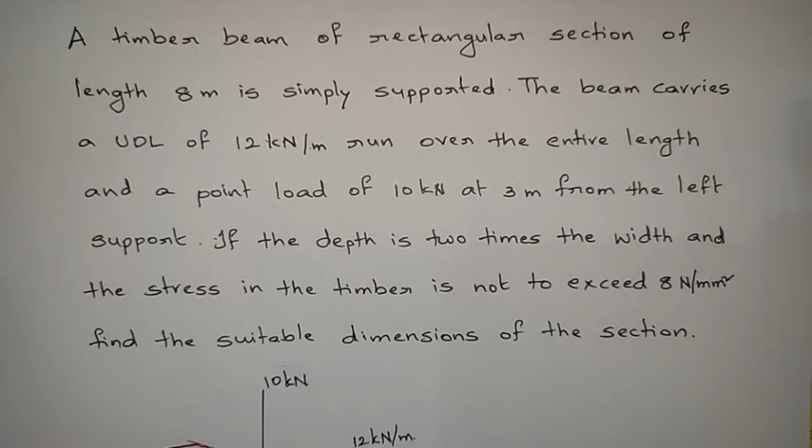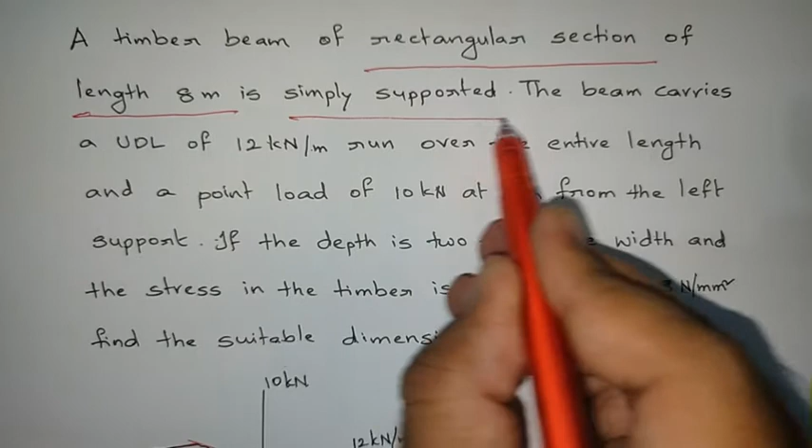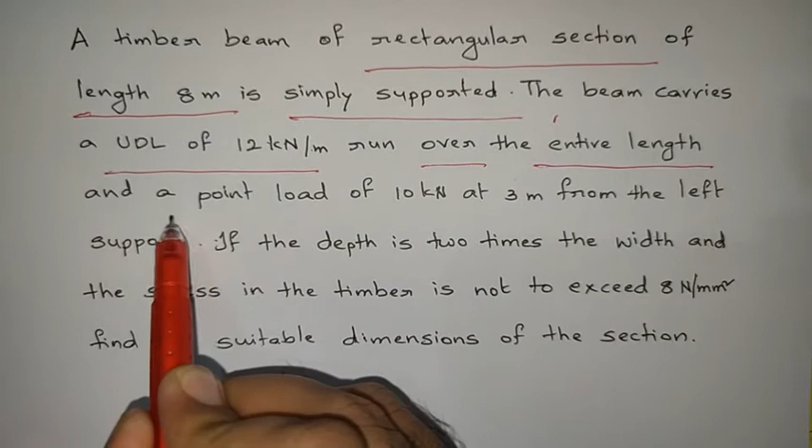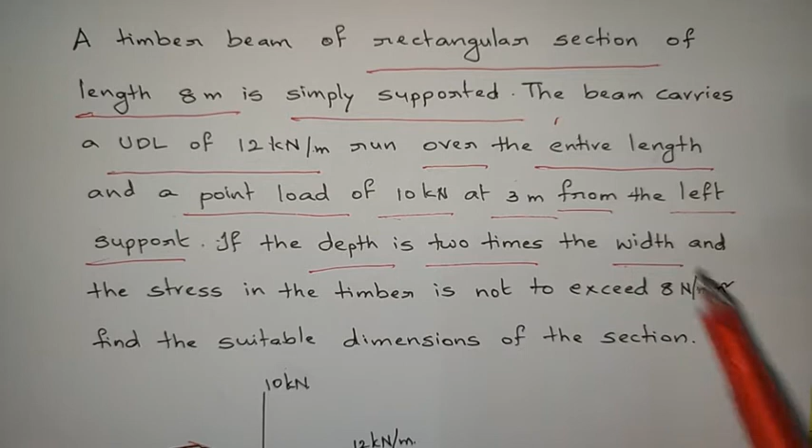Now see here: a timber beam of rectangular section, length 8 meters, is simply supported. The beam carries a UDL of 12 kN per meter run over the entire length and a point load of 10 kN at 3 meters from the left support. If the depth is 2 times the width and the stress in the timber is not to exceed 8 Newton per mm square, find the suitable dimensions of the section.

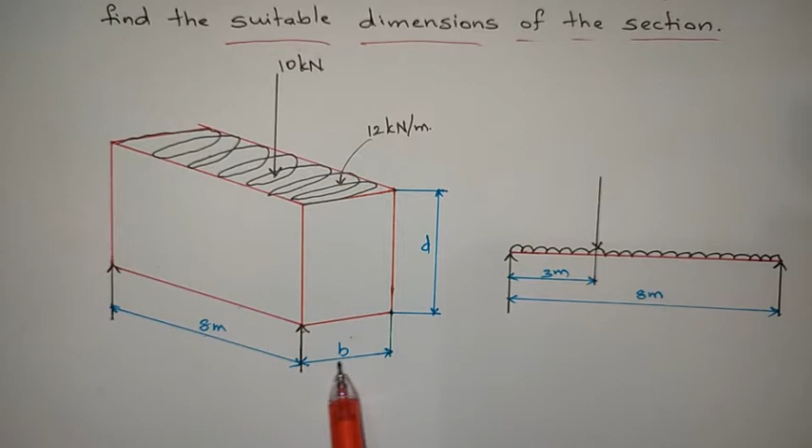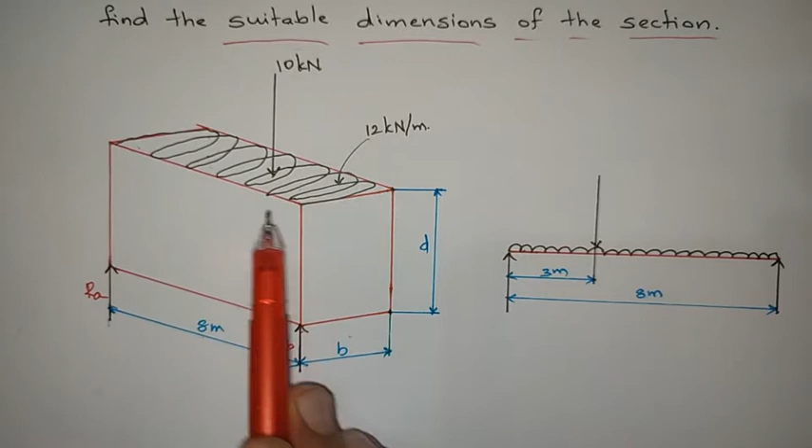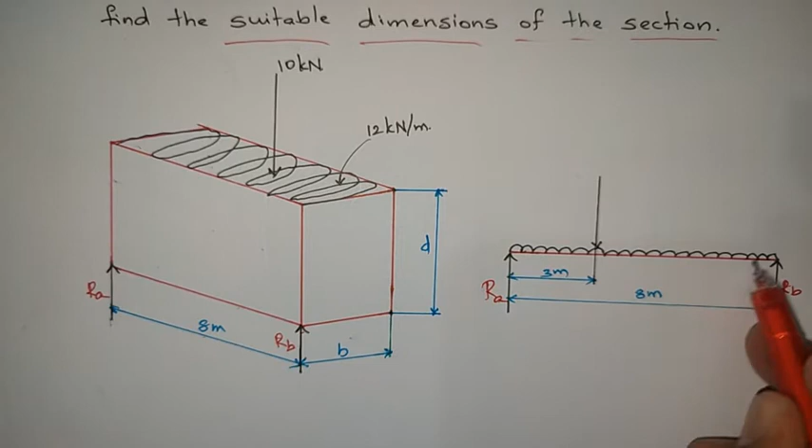Since it is simply supported, two support reactions act, RA and RB. The UDL acts over the entire length, and a point load of 10 kilonewtons acts at 3 meters from the left end. The same thing is represented in a one dimensional figure: simply supported beam, support reactions RA, RB, 8 meters length, UDL acting over the entire length at 12 kilonewton per meter, and a point load of 10 kilonewton at a distance of 3 meters from the left end.

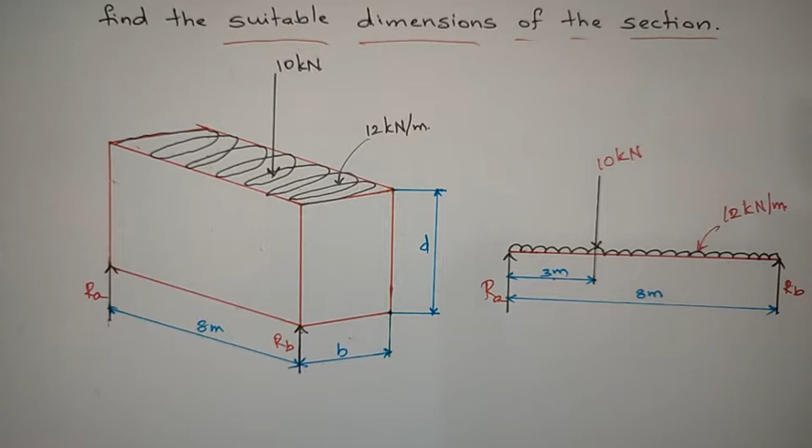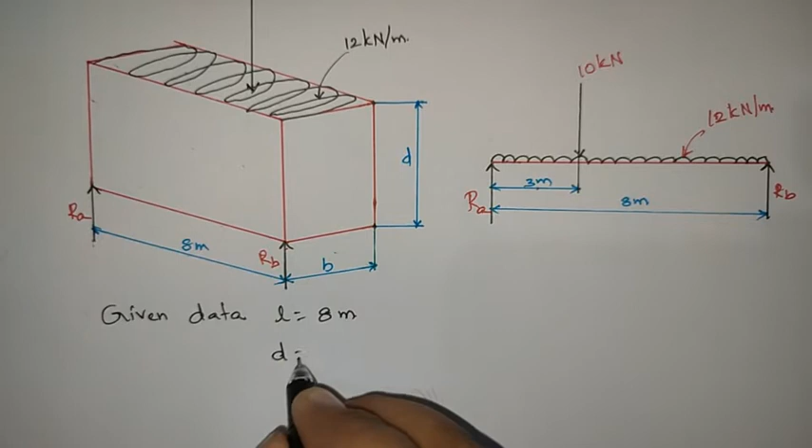He is asking us to find the dimensions of the beam, so first let us write the given data. Length of the beam is given, that equals 8 meters. Next, UDL value and point load values are given. Depth is 2 times the width, D equals 2B, and sigma max is given as 8 Newton per mm square.

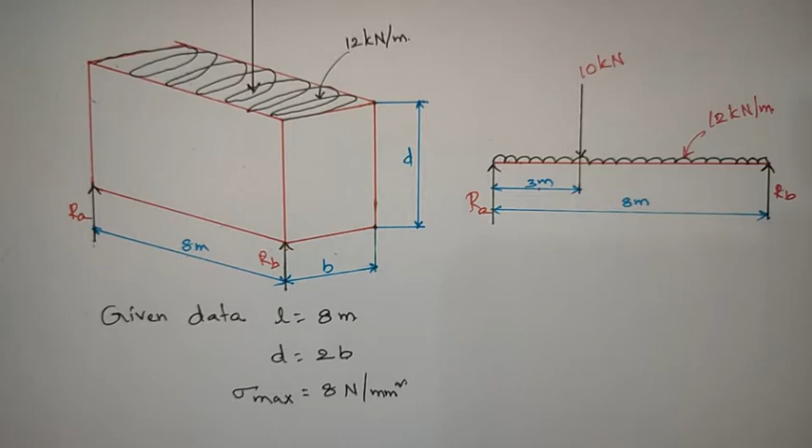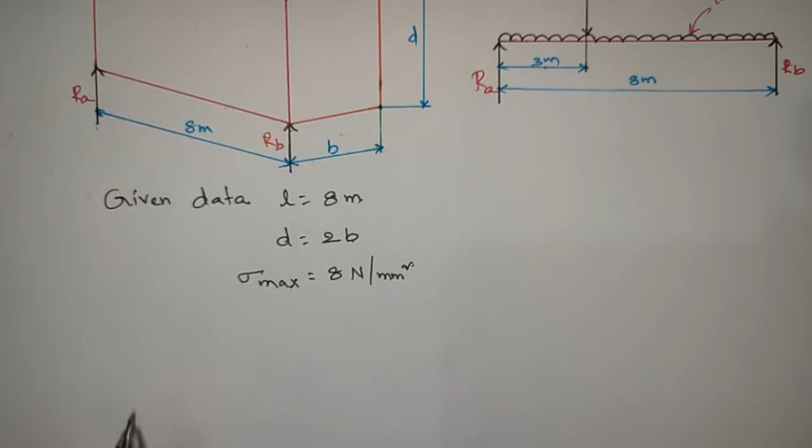Because of these two loads, a bending stress is created in the beam. Now we need to use the bending equation. What is the bending equation? M/I equals sigma/Y equals E/R. Since E and R values are not given, I am using this relation.

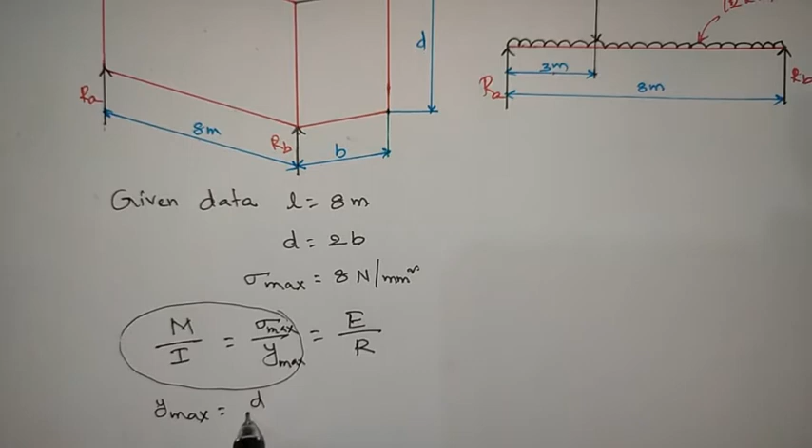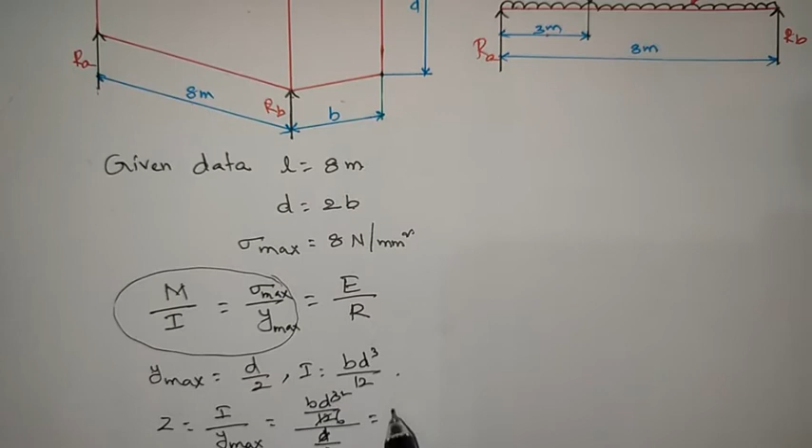This relation becomes sigma max when Y equals maximum. What is Y max? Y max equals D/2. What is the I value? BD cube by 12. Then what is Z? Z equals I by Y max, so BD cube by 12 divided by D/2, that equals BD square by 6.

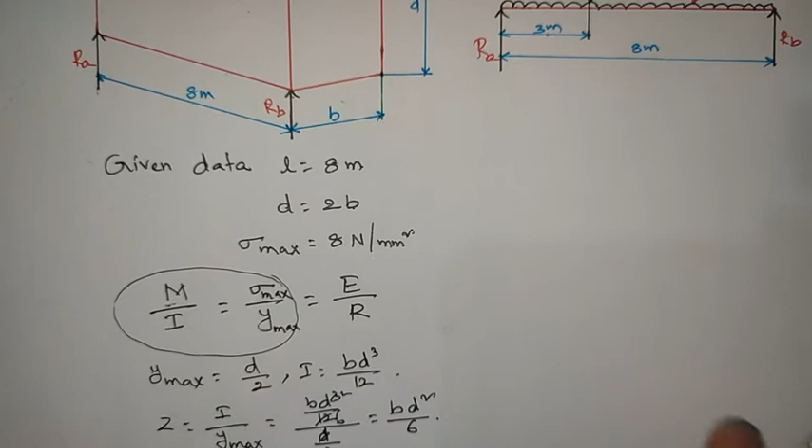Sigma max he has given. What else do we need? We need M, the maximum bending moment. How to find it? We already told that this equation governs for pure bending - it works out only when shear force equals 0.

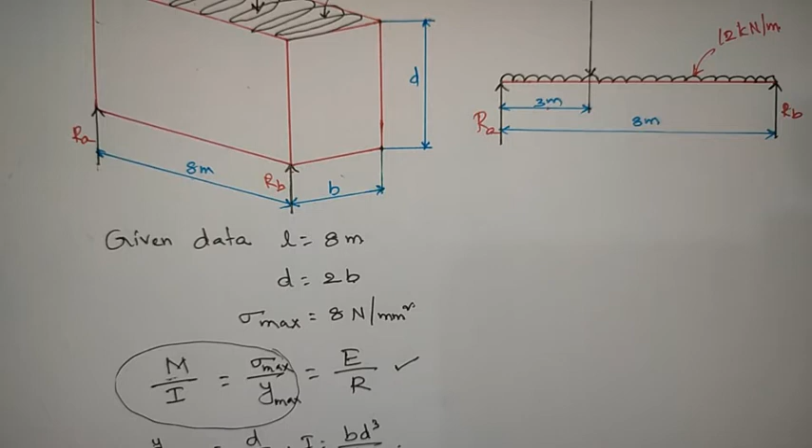Now let us solve the problem based upon this condition. I am going to calculate the shear force at a section. I am taking a section, xx section. Here I have taken a section xx.

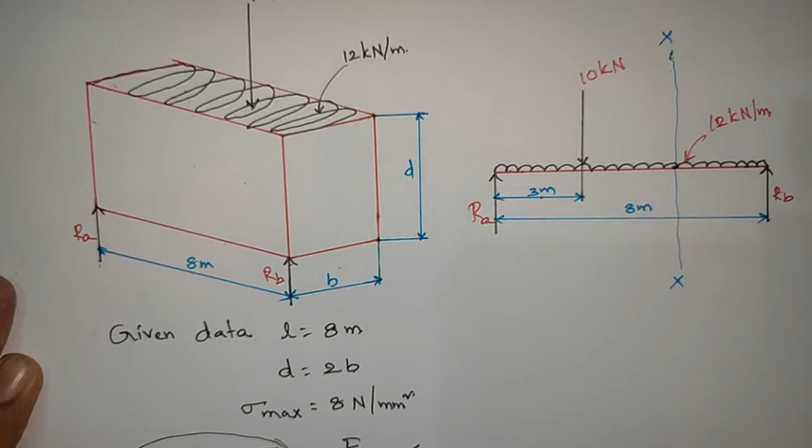Let us say the shear force at this section xx is 0. If shear force is 0, what remains completely? Only bending stress remains. Here I am assuming the shear force is 0, so that there will be only bending moment, and that bending moment will create the bending stress.

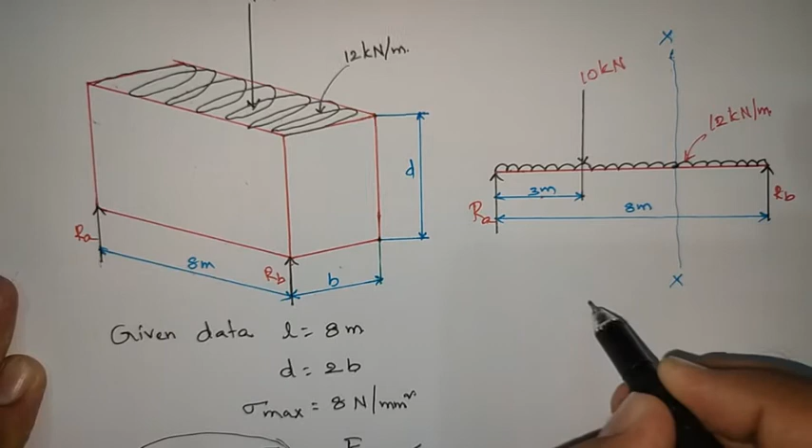First of all, find the support reactions. In order to find support reactions, first use equilibrium conditions: RA plus RB equals 10 plus 12 into 8 meters, that equals 10 plus 96, that equals 106. This is equation number 1. Next, calculate the moments with respect to A and equate to 0. Then RB into 8 meters.

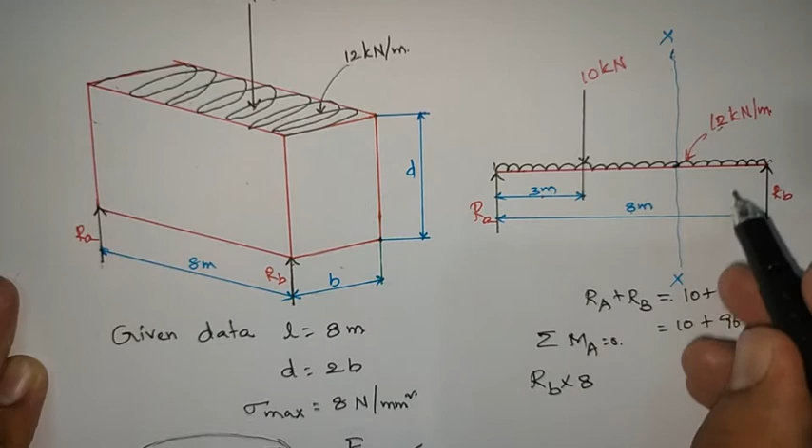Next, 12 kilonewtons - so 12 into 8, into where it is acting. If you convert this UDL into a point load, it acts at a distance of 4 meters. What is this point load value? 12 into 8, that is 96. So what is the moment? 96 into 4, but since it is clockwise, we take it as minus.

Taking moments, next 10 into 3 is also clockwise, equals to 0. So 8RB minus 2 into 4, 96 into 4, minus 30 equals to 0.

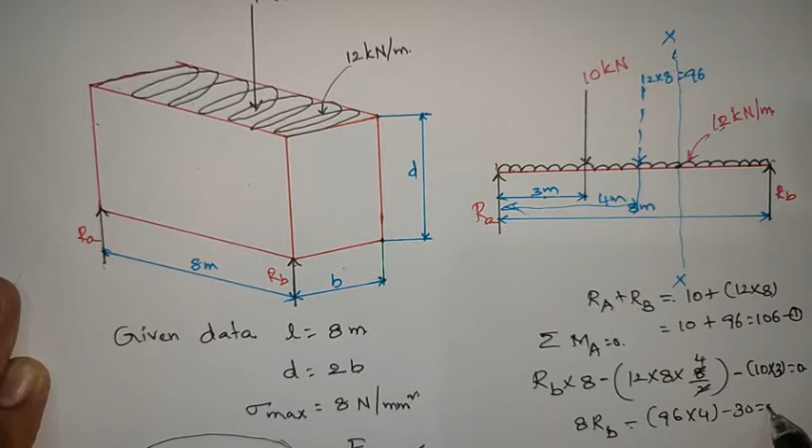So from that what we will get? We will get RB. So RB is equals to 51.75 kilonewtons.

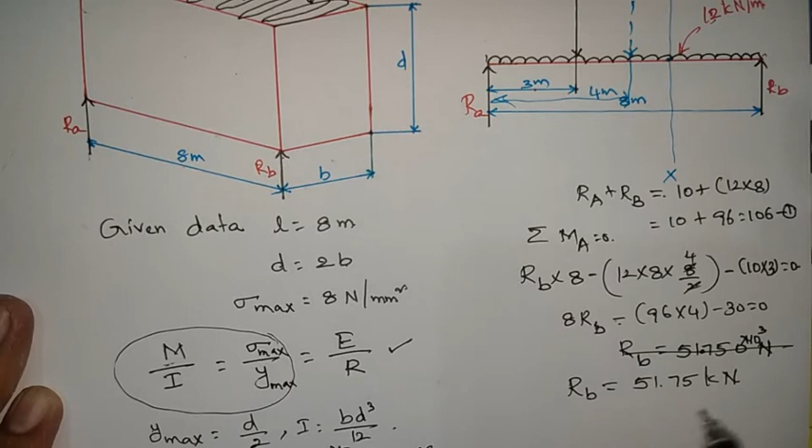So here initially you will get 51.75 into 10 cube newtons. So if you calculate RB you will get as 51.75 kilonewtons. If you convert kilonewtons into newtons, you will get 51750 newtons, right?

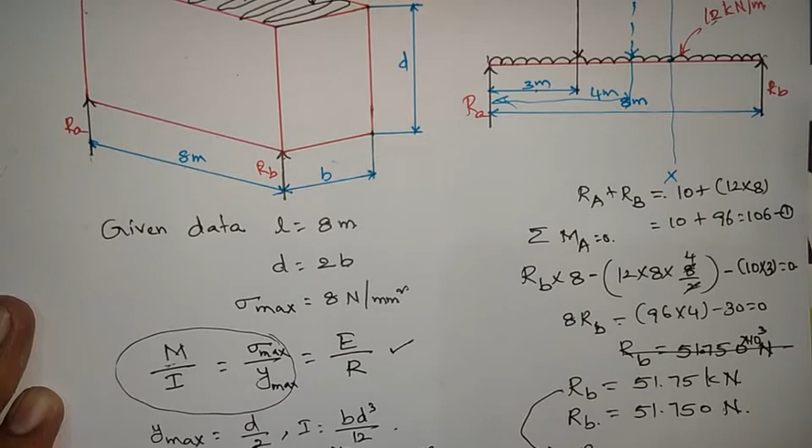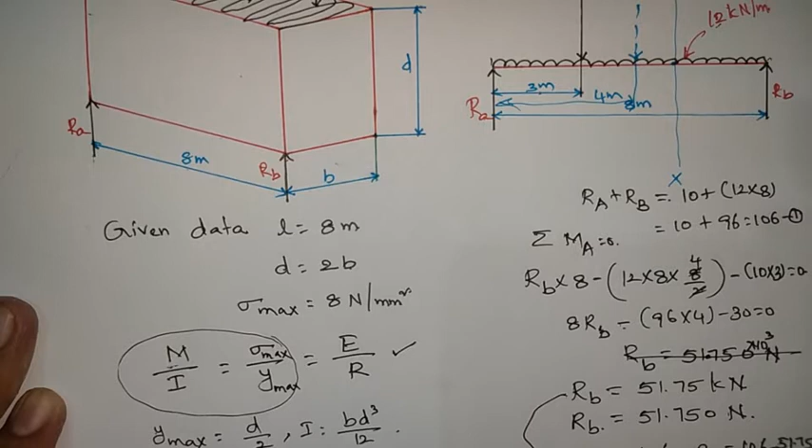Next, substitute this RB value in this equation, then RA equals to 106 minus RB. So that equals to 106 minus 51.75, so that one you will get it as RA equals to 54.25 kilonewtons. If we convert into newtons, 54250 newtons. This is RA.

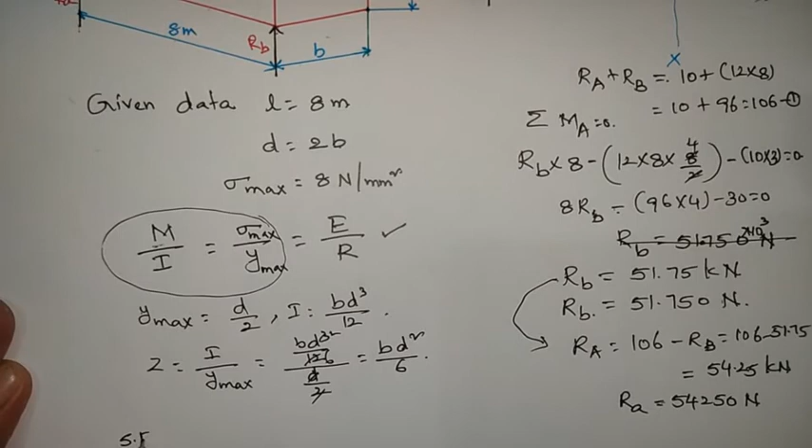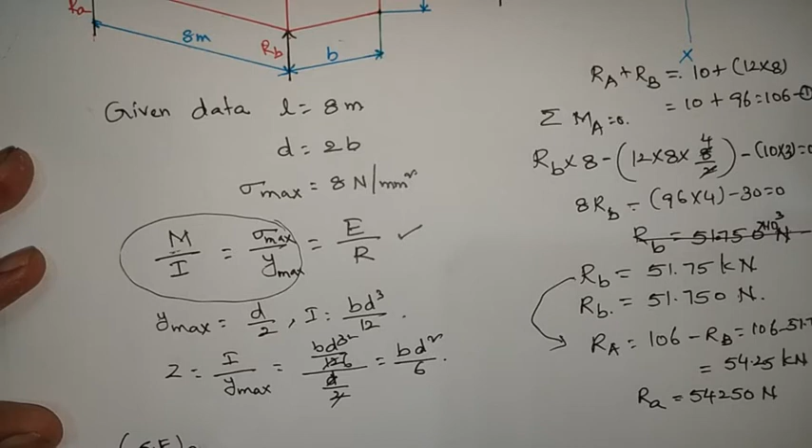Okay, so now calculate the shear forces. So first shear force at B. Here I am taking it as A, this one is B, and this one is point C. So what is shear force at B? That equals to RB. But I require the shear force at section XX.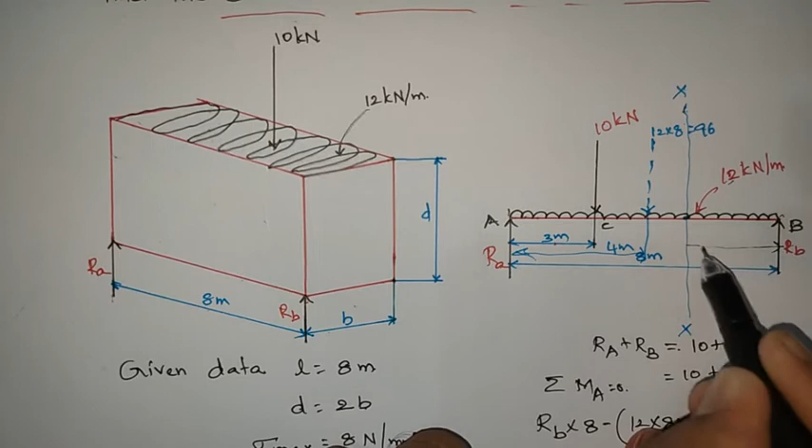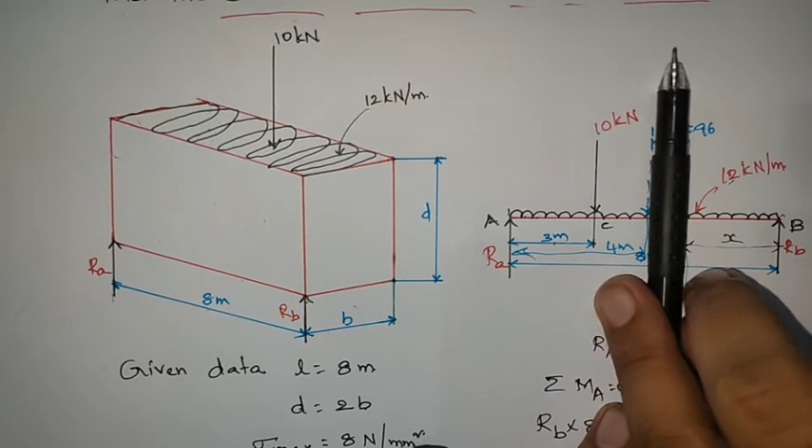I need the shear force at section XX. So what is shear force at section XX? That equals to minus RB plus 12 into x, where this section XX is at a distance of small x from B. So shear force at section XX is equals to minus RB plus 12x.

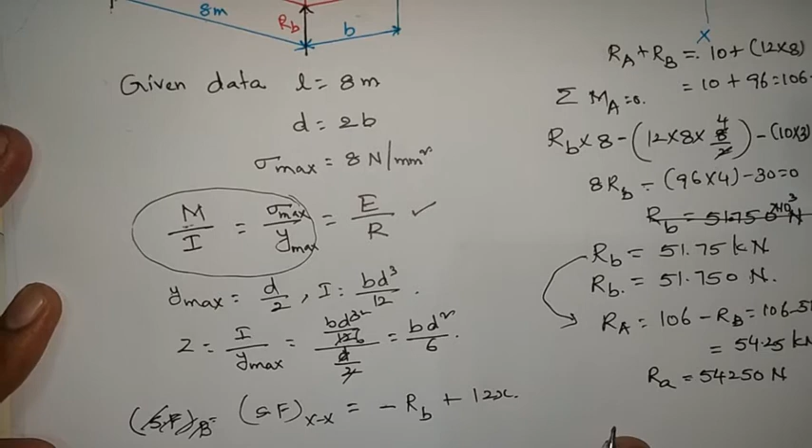What is 12? Here 12 is in terms of kilonewtons. Here I also substitute RB in kilonewtons, no problem. Substitute RB also in kilonewtons: 51.75 plus 12x. Okay, so but what I am saying, this shear force is equals to 0.

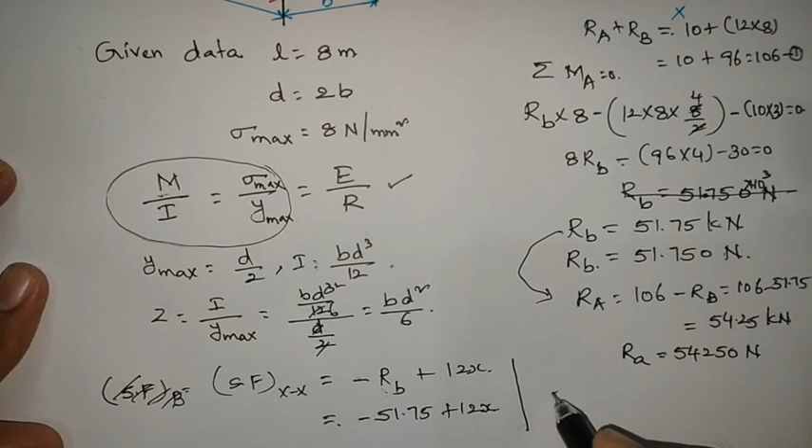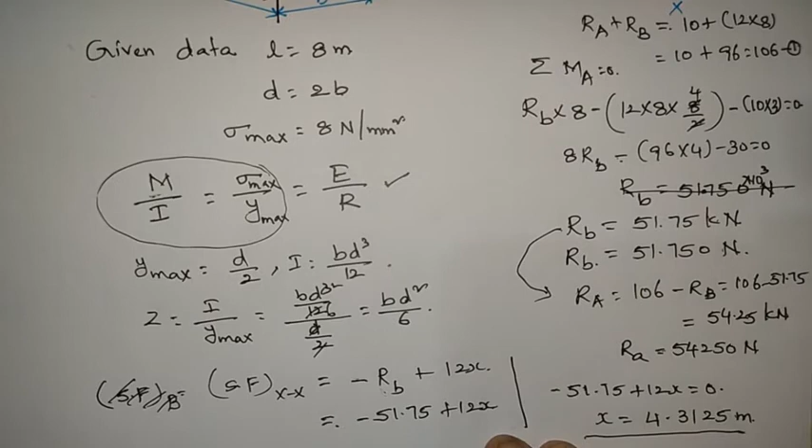I'm saying what this shear force value becomes when it equals 0. So then minus 51.75 plus 12x is equals to 0. Then what is x value? X equals to 4.3125 meters. Okay, so now calculate the bending moment at this section.

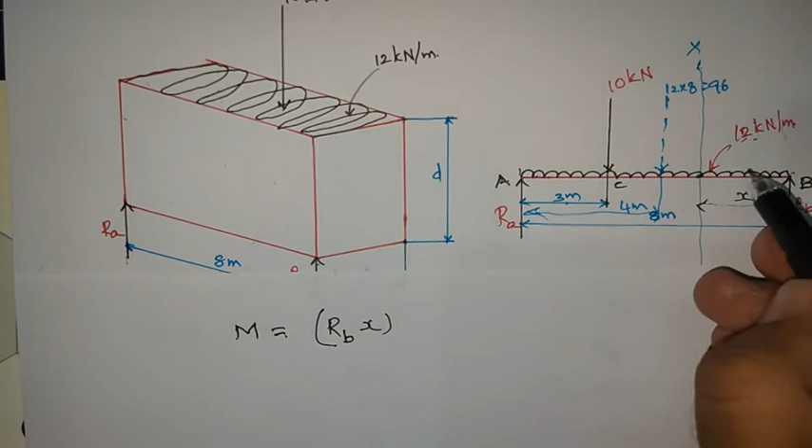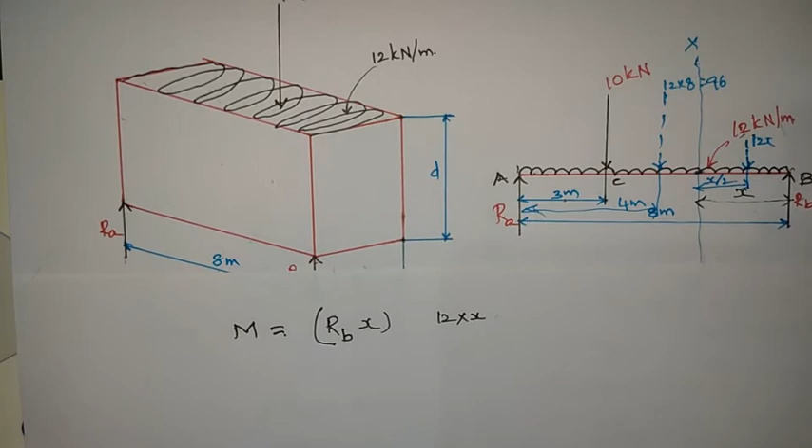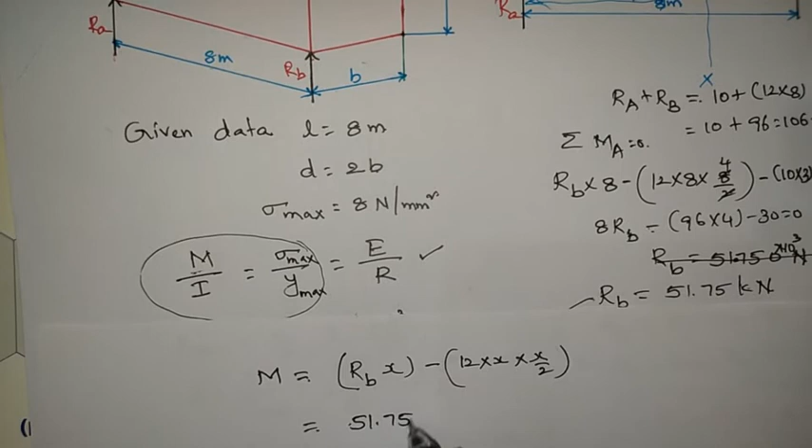So 12x into x/2, that is minus. So now substitute the values. RB, how much? 51.75 kilonewtons into x value 4.3125, we got it. So 4.3125 minus 12 into 4.3125 square by 2. So then you will get the maximum bending moment.

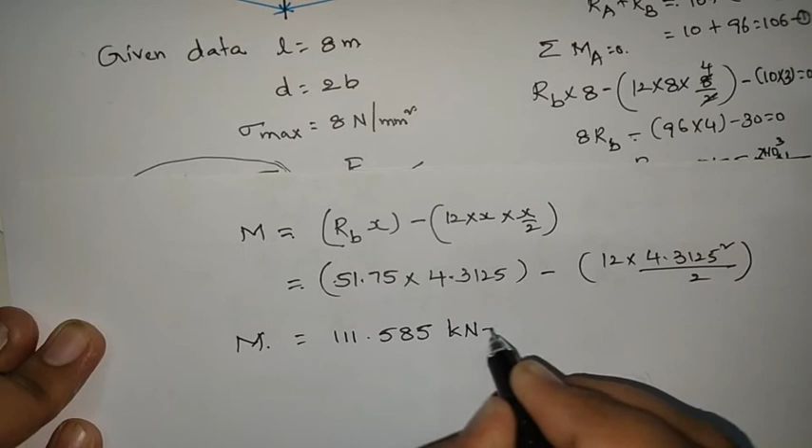So that maximum bending moment will be equals to 111.585 kilonewton meter. Why? Because we substituted RB in kilonewtons. So if you convert this into newton mm, so 111.585 into kilo means 10 cube newton.

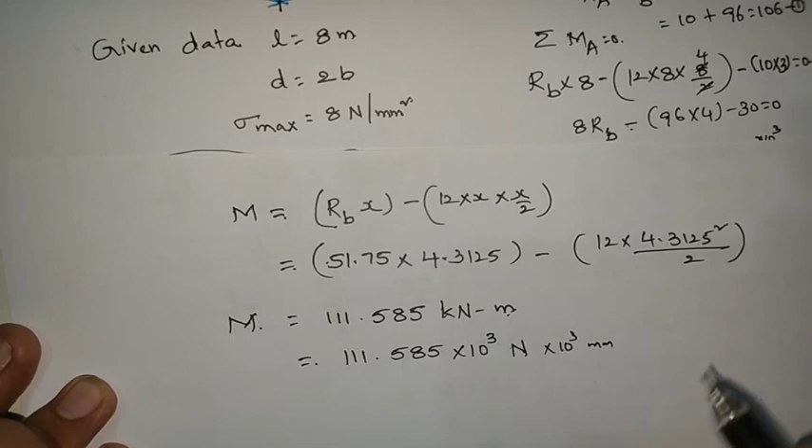For 1 meter, how many millimeters? 10 cube millimeters. So that equals to 111585 into 10 cube Newton mm.

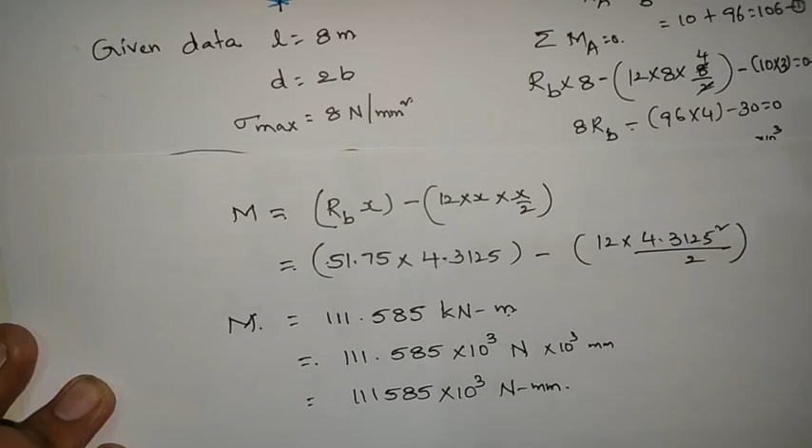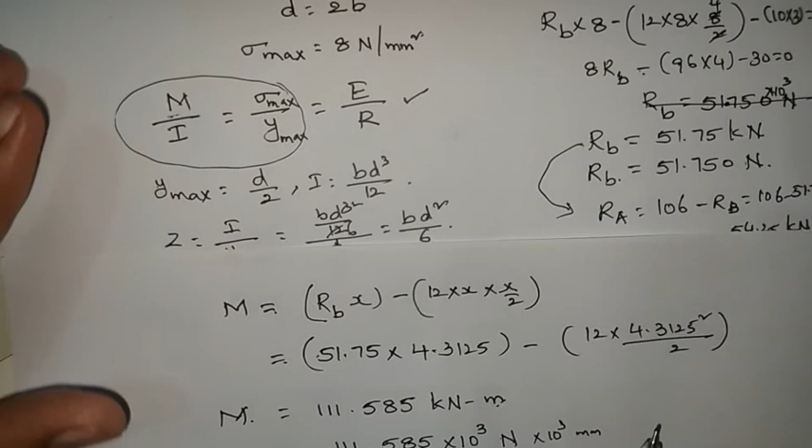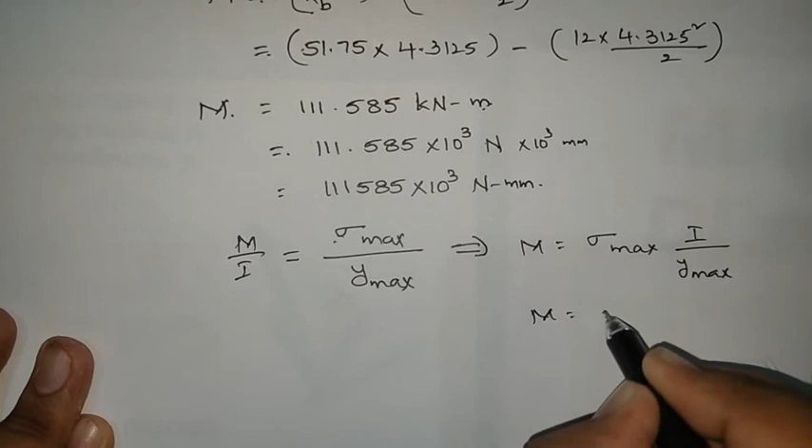Okay, so now let us substitute in this formula. So what is the formula we got? M by I is equals to sigma max by y max. So M by I is equals to sigma max by y max. So that implies M is equals to sigma max into I by y max. So M is equals to sigma max into Z.

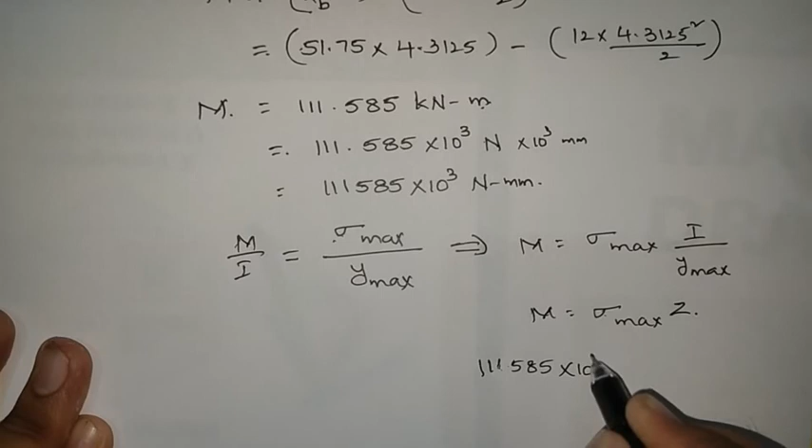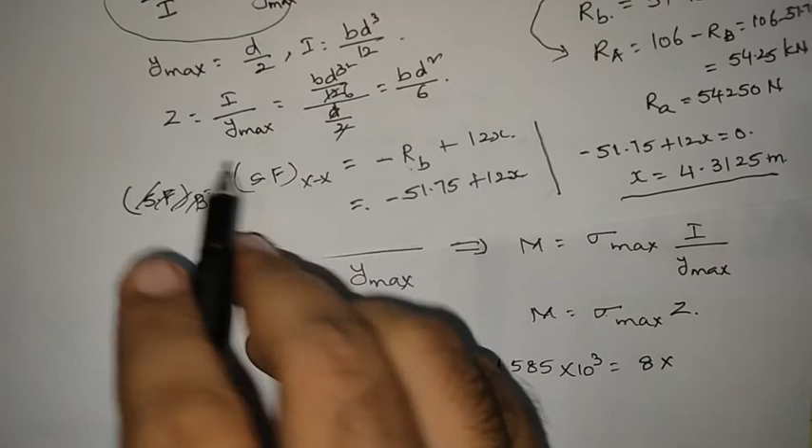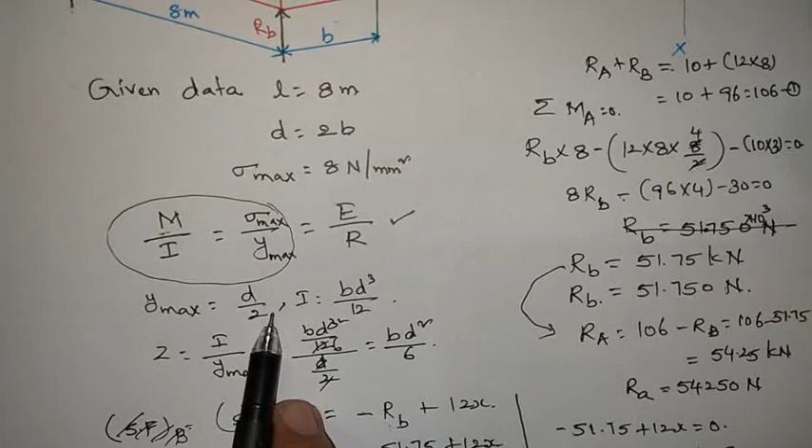So what is M value we got? 111585 into 10 cube is equals to, what is sigma max? Sigma max is 8 Newton per mm square into what is Z value? BD square by 6. But he gave depth as 2 times the width. Depth is 2 times the width.

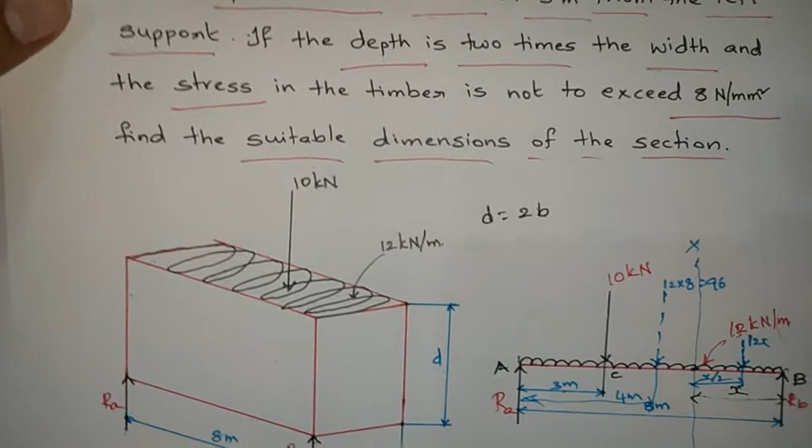So that means D equals to 2B. Okay, now substitute that also. So 111.585 into 10 cube is equals to 8 into B, in place of D write B, 2 times of B whole square by 6. So 111.585 into 10 cube equals to 32B square by 6. From that we can calculate B.

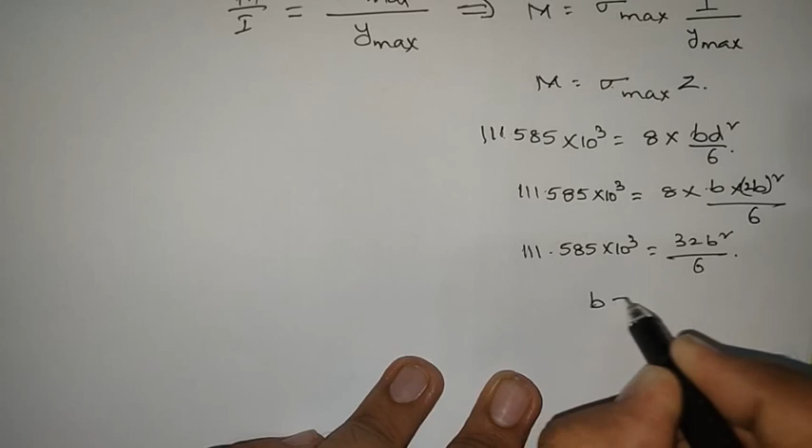So you will get B as 275.5 mm. Then what is depth? Depth D equals to 2 times of B. So 2 into 275.5, so that equals to 551 mm.

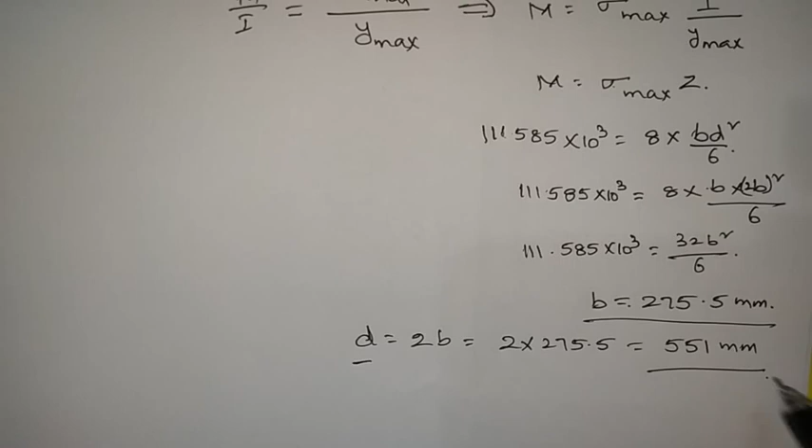So like this we need to solve the problems, right? This is how we must solve such problems. So I hope you understand this problem.